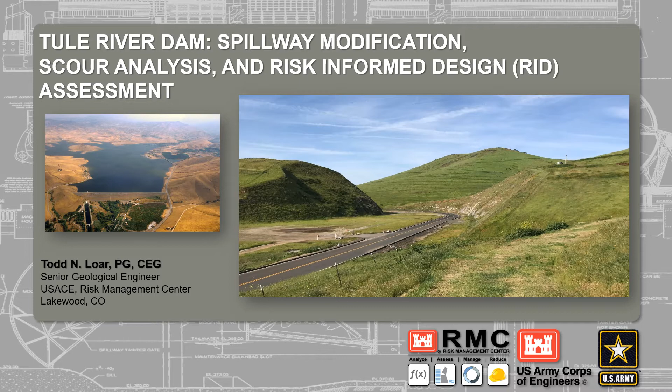Good afternoon. This case history is intended to present an example of how a risk-informed design process, our RID process, was applied to optimize a design concept for a spillway enlargement project at the Tule River Dam site. Specifically, we'll focus on the geotechnical site characterization and geotechnical failure modes that the RID process was associated with in terms of evaluating the design features and components for this enlargement.

The Tule River Dam is located east of Porterville, California, in the southern San Joaquin Valley and north of Bakersfield, and it's positioned at the lower elevations of the Sierra Nevada foothills on the east side of the San Joaquin Valley.

One thing to note is on some drawings and some references, this dam has also previously been called Richard L. Schafer Dam or Success Dam. The name has changed over time periodically, and some of those names still are on some of the reference figures and documents.

So to start things off, we're going to go back in time a little bit, to 2015, for the baseline risk assessment, the first risk assessment performed for Tule Dam. A whole slew of failure modes were identified, a lot of them related to dam performance, seismic issues, gate issues, and that sort of thing. But the primary risk-driving failure modes were identified as overtopping of the main dam and overtopping of a dike that's located further up in the reservoir.

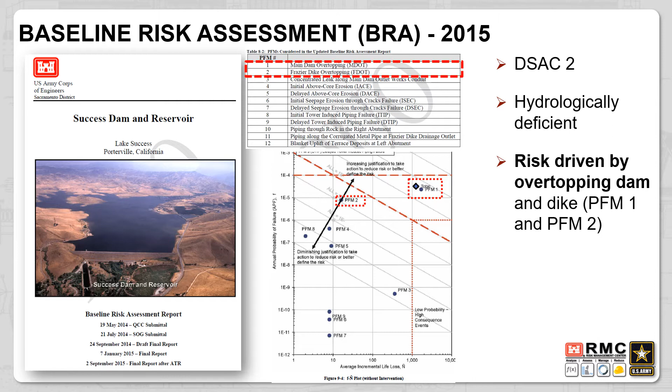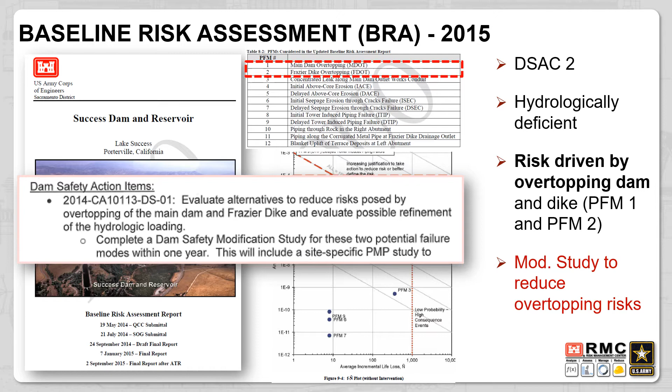The decision makers at the Army Corps, when they reviewed the project and the risk assessment, made recommendations that the teams look at performing a dam safety modification study, to evaluate structural or other types of alternatives that we could implement to reduce the risk of overtopping at the project.

The design teams came up with a concept of enlarging the spillway, increasing the capacity of the existing spillway. This was broken into two phases. Phase one would widen the spillway channel invert by about 120 feet or so, done by pushing the right spillway cut further to the north and then relocating one of the access roads that goes around it. Phase two would involve raising the spillway crest by about 10 feet to increase reservoir capacity.

This would be done with an arched ogee weir structure with apron and training walls. I should note that phase one was a little bit too far advanced in the design process and funding mechanics to implement RID on that phase of the project, so we would focus on phase two for the most part.

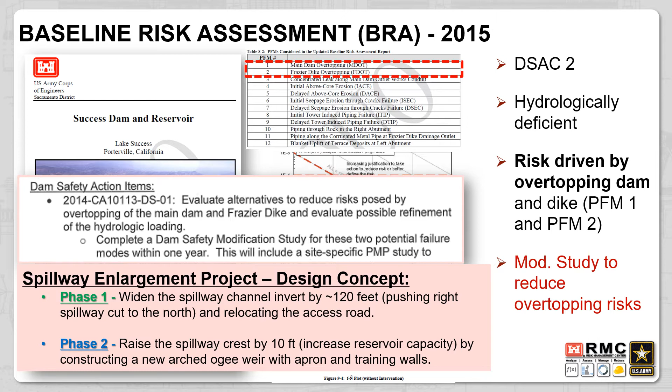We have an overall layout of the existing spillway configuration. The spillway itself is located in a deep cut about 750 feet to the northwest of the right abutment of the embankment dam. The spillway is unlined, and the invert is generally composed of variably fractured, variably weathered granitic intrusive rocks and some metasedimentary rocks with intrusive veins and dikes, typical of the foothills in the Sierras. The cut is about 120 to 140 feet deep, perpendicular to the right abutment ridge line, and the invert itself is about 250 feet wide.

That would have to be increased for the mod study repair. The current layout has a concrete control sill about 39, 40 feet below the crest of the dam, constructed into about a 6-foot deep trench, and it extends up the abutment side slopes.

We'll see a picture of that in a minute. The approach channel is about 500 feet long, and the downstream discharge channel is on the order of 700 feet long, all relatively flat, about a 1% grade. Downstream, the channel re-enters the existing drainage system that's downstream of the right abutment ridgeline.

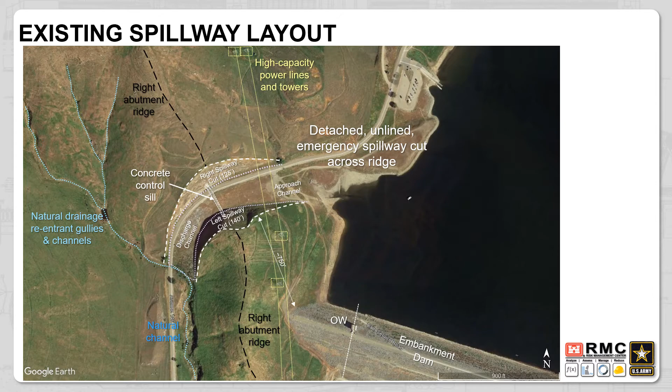Here are some general photos and layout pictures of the construction of the control sill. On the upper right, we're looking downstream and we see the right abutment sill and the left abutment sill embedded in and coming up the rock mass about 10 to 15 feet or so. In the center, you see the construction photo where we have the 200-foot long, 3-foot wide control sill that's socketed 6 feet into rock.

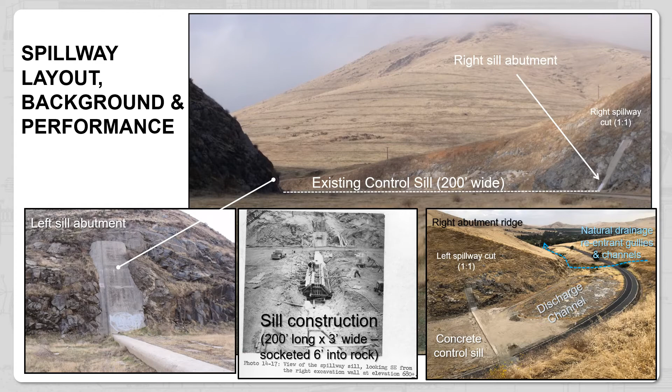The entire spillway channel was excavated using blasting methods. Here we are looking at a series of photos of the left abutment in 1959 during construction, as the operators were getting down toward this existing invert elevation.

A wedge-shaped slab of rock failed out of the left abutment cut. The wedge was formed by adversely oriented joint sets and some tension cracks forming in the rock mass on the left abutment. One of the primary things to note is that the sliding plane, the basal sliding plane controlling this wedge slab, has an out-of-slope orientation.

So that means it's dipping toward the spillway, representing a potential sliding surface for rock wedges and rock slopes. This feature is seen in other construction photos and in the field, so we have this out-of-slope dipping joint set that is potentially a bit adverse. However, over the duration of this project, since this '59 small slab failure, there's really only been small rock blocks raveling off the slope on both abutments. There has not been reactivation of this failure or any other large-scale similar slab failures on either abutment.

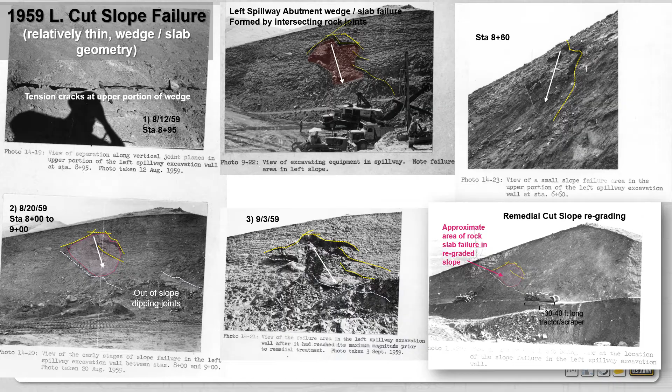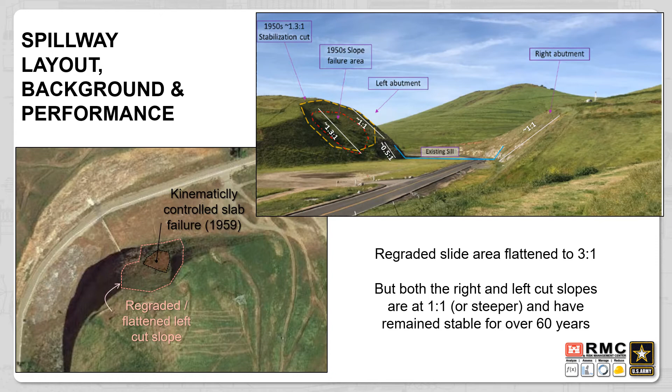The only spillway flows that have ever occurred at the Tule River project were in 1966, with a peak discharge of about 8,300 CFS through the spillway weir, shown on the hydrograph below. You can see it's a very sharp peak that dropped off fairly quickly. The peak only flowed for a handful of hours.

However, the overall duration of the spill was on the order of 120 hours passing over the sill. Downstream of the invert, downstream of the construction spillway floor where it re-enters the natural drainage channel, erosion was observed. This occurred where all that water concentrated and increased its energy going back into the natural erosion channel. So there was some previous erosion that did occur with this 1966 spill.

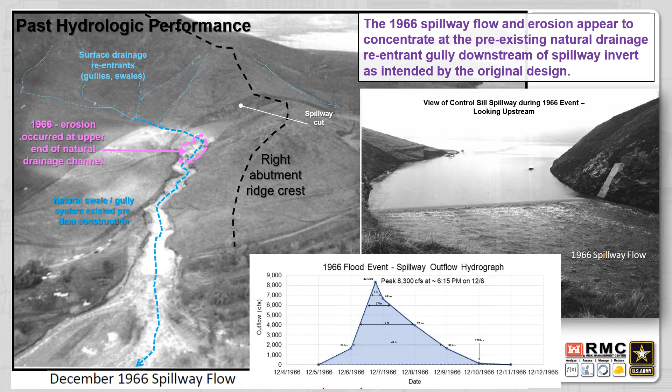One thing to note too are all the surface drainage gullies and drainage reentrants or swales on the downstream side of the right abutment ridge crest, and on the upstream side actually. All those are coalescing and getting into the main reentrant channel downstream of the spillway, then getting back into the Tule River spillway or river downstream. We'll discuss this a little bit.

Now we're able to look at the right abutment of the dam and the alignment of the spillway on a pre-construction aerial photo. We can see the spillway cut I've annotated on there, and you can kind of see the drainage reentrants. The first thing to notice, all these drainage reentrants, we map all of them and tie them into the higher order streams and drainages. We see that the drainage reentrant turns almost 90 degrees at the base of, at the downstream end of the spillway, the future spillway.

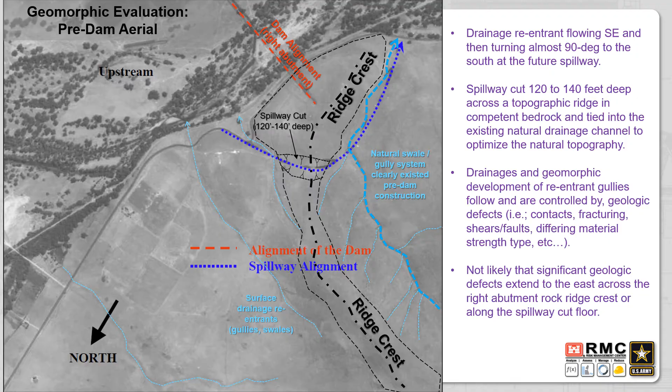The regional geology in the area consists of older metasedimentary rocks and metavolcanic rocks that have been subsequently intruded by younger granite domes and granite intrusions that have come up into those overlying host rocks. They come with a lot of hydrothermal alteration and dikes and veins that extrude out into the overlying rock mass or discontinuity features. This is very common of the Sierra Nevada batholiths, especially in the western part of the Sierra Nevada foothills.

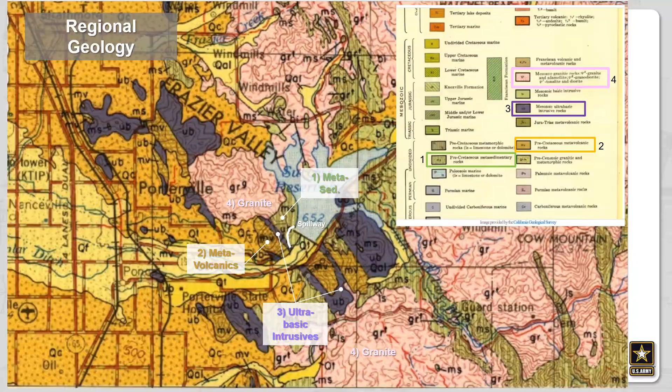Using the spillway floor and spillway sill cut mapping, control sill trench floor mapping, aerial photo delineation of lineaments and features observed in the cut slopes, delineation of weathered versus unweathered zones, and the field mapping effort, all are compiled to understand the geologic conditions, the fracturing, the location of shears, and the areas of contacts that we may need to look for.

For the most part, the mass of the spillway is excavated through what would be characterized as fairly competent granitic or quartz diorite type bedrock, but there's clearly zones or pockets of highly weathered rock or more intensely fractured or broken up rock zones. These zones need to be more clearly delineated, and that's what we do further on in the field studies.

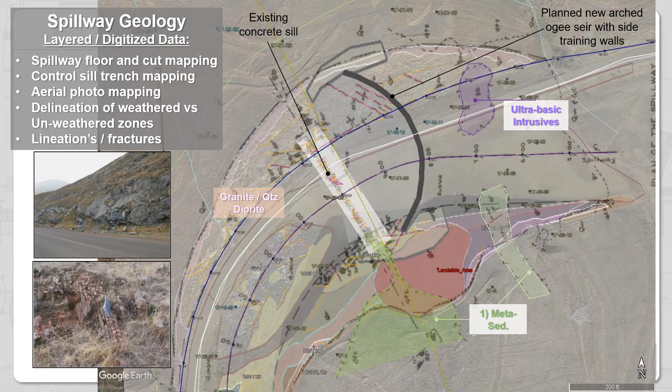Based on the field observations and field mapping, we were able to identify areas where there was more intense weathering. One thing that does jump out is that there seems to be a weathering rind across the top of the granitic and diorite intrusive rocks on both abutments.

And then there are areas or pockets, as I mentioned before, of more highly to moderately weathered and highly fractured rock. So the key for spillway erosion is to try to identify or map out spatially, vertically and horizontally, where these areas of more erosion-susceptible rock masses may or may not exist, and to try to extrapolate those in the direction of the erosion and with depth, to understand those areas a little bit better.

So that's what this map is compiling, all of the observations and all of the field information that we are able to compile from the drilling and the field mapping and other efforts.

We were fortunate enough that during original construction there was geologic mapping of the sill base, the floor, and also a cross-section compiled looking downstream. So that's what's shown here. On the top we're looking at the sill floor in plan view, and down below we're looking at the sill slope, like a cross-section along that sill alignment.

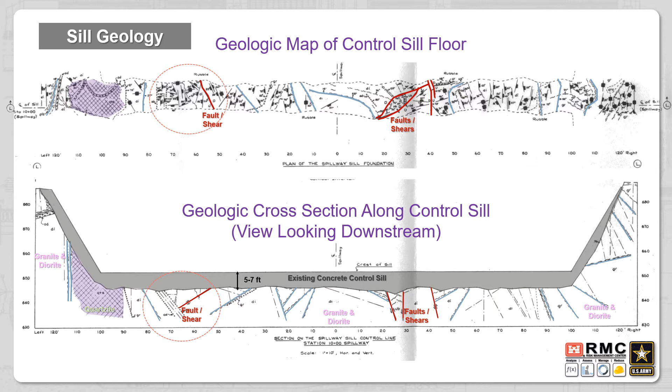And that correlates with some of the observations we saw.

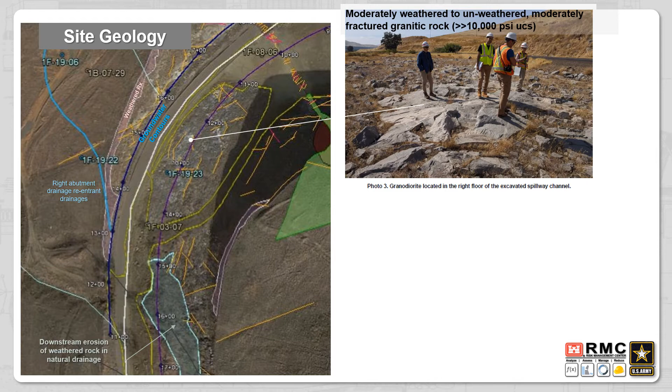During some of the field exploration and mapping efforts, the teams were able to identify and delineate these areas of good versus bad or poor rock masses. For the most part, across almost a majority of the sill invert foundation, we see that we have moderately to unweathered and moderately fractured granitic rock that is of high rock mass quality. It has well over 10,000 psi for the unconfined compressive strength. The joints are somewhat blocky and discontinuous, making up a very highly resistant rock mass for perhaps 90% or more of the entire spillway foundation.

But similar to what we saw in that last section, on the left side of the spillway invert toward the base of the slope, there was a zone that was identified that looked to be slightly more weathered. It was highly to moderately weathered and more highly fractured, and this correlated with lower unconfined compressive strengths of less than about 5,000 psi. This is the material that's also exposed in the erosion channel at the downstream natural drainage reentrant.

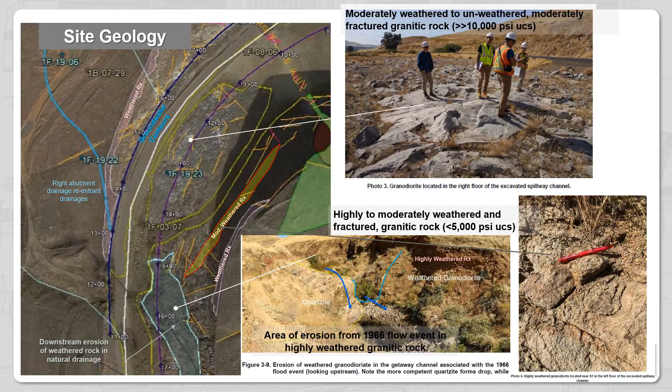All right, so now we have a little bit of a concept of the geologic conditions in the abutments and abutment cuts and the spillway invert. So let's talk a little bit about the design.

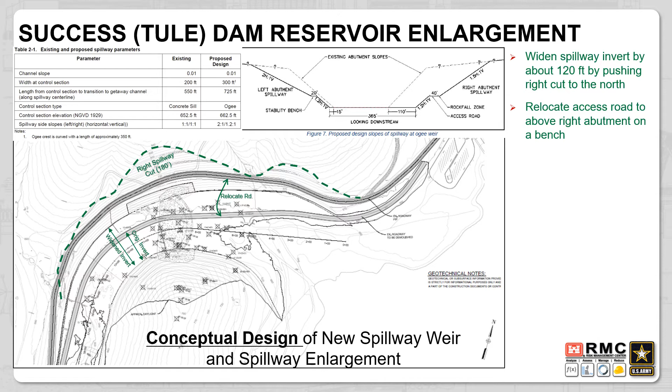Phase 1, as I mentioned before, the project was broken into phases. Phase 1 would involve pushing the right cut slope about 120 feet to the north, and then relocating the access road above the planned new weir crest elevation. Phase 2 would involve construction of a new concrete arch spillway weir about 10 feet above the current sill elevation.

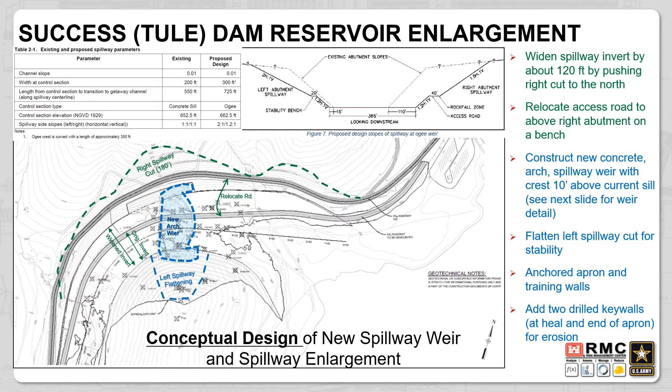We would potentially flatten the left spillway cut to improve stability, and then we'd add anchored training walls on both sides of the spillway. The design also involved putting two drilled key walls, like erosion resistant cutoff walls, at the heel of the arched weir and at the toe of the apron.

All right, so this is the preliminary phase 2 weir structure design, and this was what we had going into the RID evaluation, the risk informed design evaluation. We have the new arched concrete weir to transfer loads out into the abutments. Both abutments would be protected with upstream and downstream concrete training walls, and we will extend the new apron in a downstream direction.

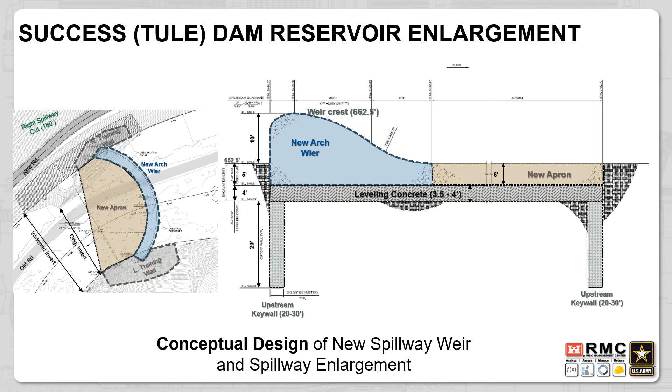On the right, we see the cross section. So we see that we have almost 9 feet of excavation into the rock, into the existing spillway invert. And then we have the two key walls, downstream key wall on the right and upstream key wall on the left. These were intended to extend 20 to 30 feet and be constructed with large diameter drilled columns through the granitic rock in the foundation.

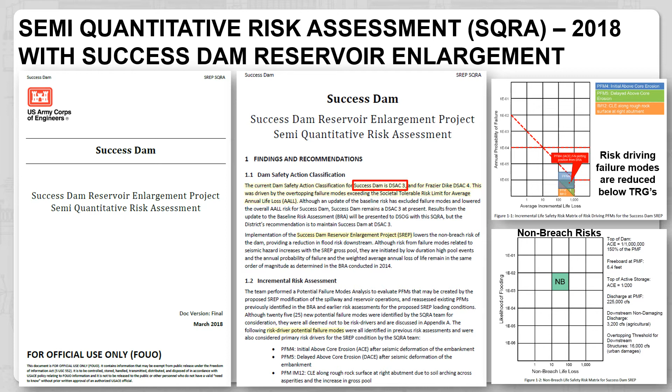Okay, so real quick for reference, throughout this process, the risk cadre and the district got back together in 2018, and they did not look specifically at the design details of the spillway. What they looked at more in general was whether the new spillway design adequately passed flows so that we would reduce the risk of PFMs related to overtopping. The findings were that yes, the new spillway design, the enlarged capacity of the spillway, would reduce the potential for overtopping and improve our risk related to those failure modes at this project.

So risk-informed design at the Army Corps is dictated in Engineering and Construction Bulletin 2019-15, which requires risk-informed design as part of project delivery. This is to help ensure the designs meet USACE tolerable risk guidelines and develop a basis for design for uncertain engineering conditions or decisions.

For our case, we wanted to look at potential for scour, loading on the weirs, the abutments and cut slope stability issues, structural stability, sliding stability, and put this into a risk framework, which had not been done in that amount of detail in previous risk assessments. This also helps us identify vulnerabilities and susceptibilities in the design, because there's always a possibility that a design element in a project might actually cause an increase in downstream risks, so we've got to put that into context.

The other thing the RID does is help us optimize the design and focus on the more susceptible elements of the project rather than just taking a template off the shelf and using traditional concepts in that design. This also helps improve our communication of major design decisions. The RID is scaled to fit the schedule and scope of the project, so it's a little different than our SQRAs or QRAs, which have a very robust amount of work and expectation. The RIDs can be scaled to fit the project more appropriately.

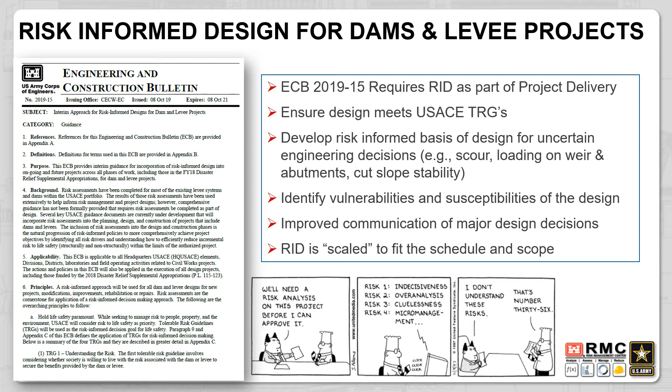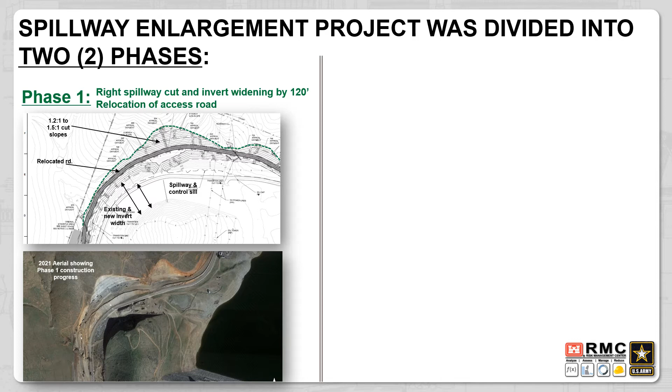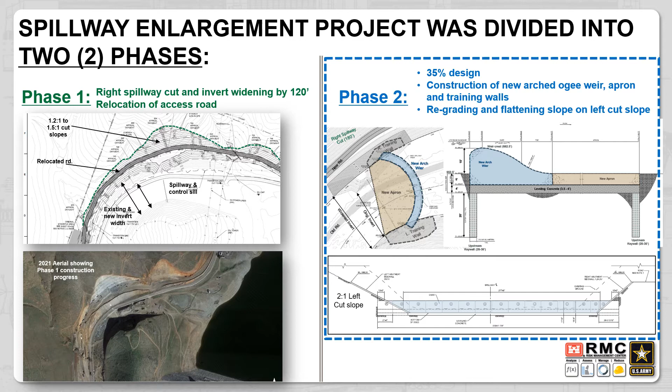Okay, so I think this is sort of a repeat slide, but the point here is that phase 1 involved cut slope construction, pushing the cut slope on the right side 120 feet to the north, and that was not part of the RID evaluation—it had been too far along to include. But what was included was the 35% design for construction of the new arched ogee weir with the apron, training walls, and upstream downstream key walls, and then regrading of the left abutment slope. So that's what we were mostly focusing on in this effort.

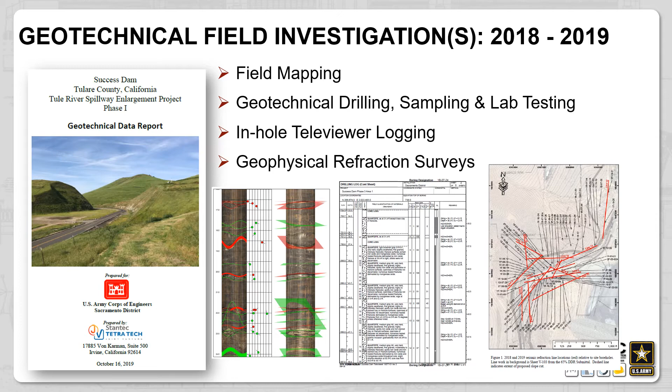Okay, so we're going to go over a little bit of the field data and the information that was collected that we had to work with respect to performing the geotechnical risk assessments for the new weir structure. A lot of this information was collected between 2018 and 2019, including field mapping, geotechnical drilling, sampling, and lab testing, in-hole or down-hole televiewer logging, and some superficial geophysical refraction surveys and other information. So we'll run through all that as fast as is practical.

All right, so the SPK district, Sacramento district, had developed these processes, I believe, for Isabella and possibly other projects where they made criteria and defined their various weathering degrees for granitic type foundation rock, ranging from decomposed granite to highly weathered, moderately weathered, slightly weathered, and unweathered. They have a lot of criteria, evidence, and cross-referenced information that can be used to map, delineate, or log the granitic rock according to these weathering grades. There's also other weathering grade criteria and tables that are useful to use.

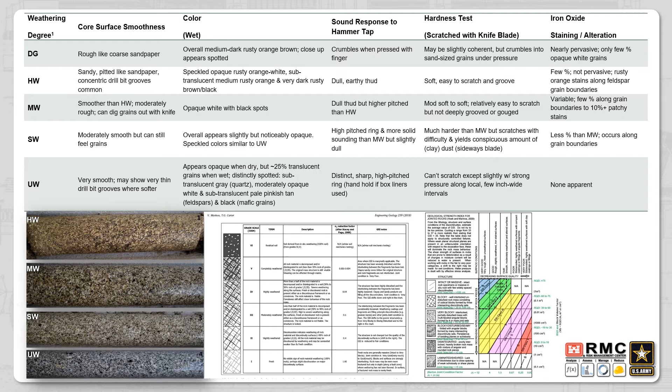Another way to do this would be to use, for example, a GSI type mapping of the rock mass, which includes both weathering grade but also fracture intensity. But SPK also was able to bring the degree of fracturing into their mapping.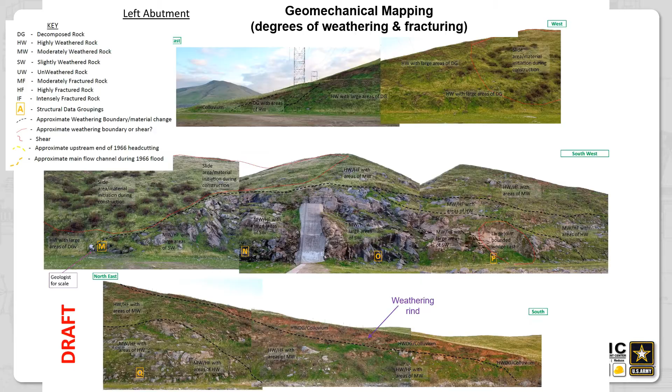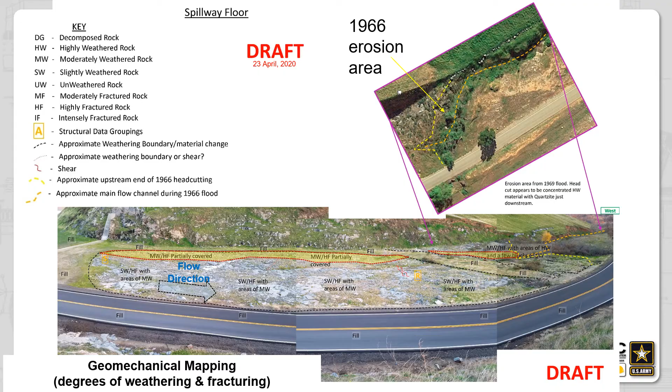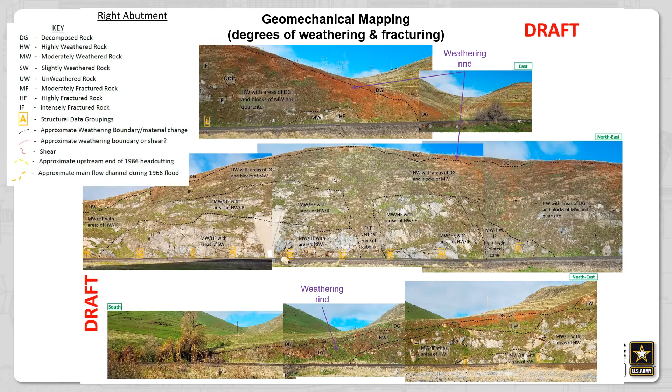So we have to be able to understand what the spatial extent and distribution is of those highly weathered or challenging zones, and figure out if those exist in the area of the spillway flow.

The typical geotechnical subsurface data collected, compiled, and synthesized throughout the project utilized all of the rock quality parameters measured in the field and in the mapping: RQD, RMR (rock mass rating), weathering, and fracture intensity. What we see when we compile all this information is that for the most part, all these parameters improve with depth, particularly below about 20 to 40 feet or so. The rock quality improves, the strength improves, the weathering reduces, and the fracture intensity becomes less tightly spaced. So overall, in almost all the drill holes and almost all the data we've got, we see this improving rock mass quality with increasing depth.

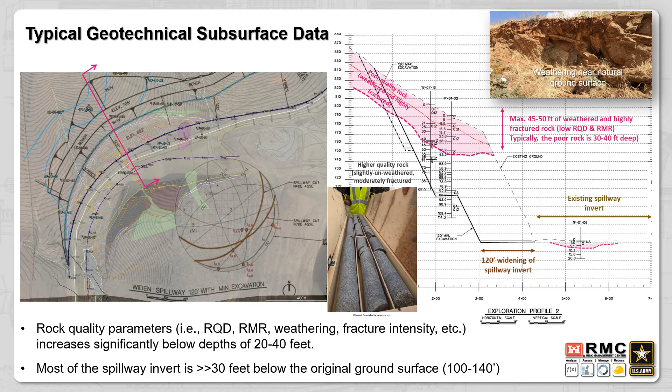Most of the spillway invert is well over this 30 to 40 foot depth below the original ground surface, if we remember. So it's probably mostly on the order of 100, 120 to 140 feet deep through the most critical part of the spillway invert.

Just a quick statistical graphic showing the relative unconfined compressive strength of the different weathering grades identified in the granitic rock. For the most part, the average of all the rock mass that was better than moderately weathered had an average PSI of about 20,000 pounds per square inch. So even the moderately weathered granitic rock has really high unconfined compressive strengths.

We also have to realize it's the degree of fracturing and fracture orientations and that sort of thing that may control erosion, but that's a good indicator of pretty competent, strong intact materials. The highly weathered material is very weak, in that geomechanical zone of less than about 2,000 psi, where it is weathered and can be eroded and plucked, with particles just pulled out of that type of material.

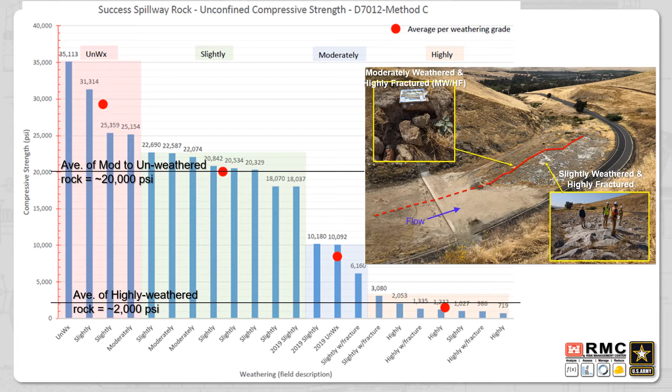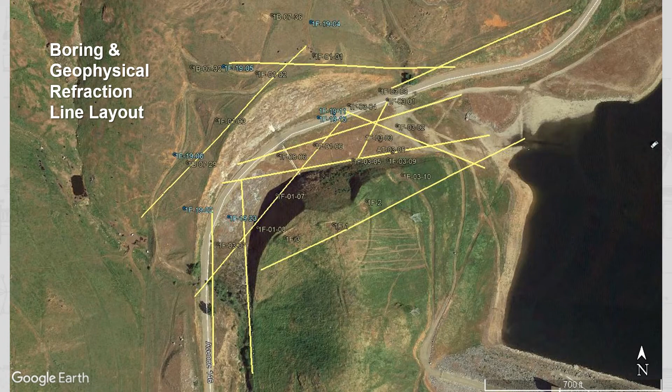Here's a layout of all the geophysical lines that were run, the refraction lines. We have a number of them that cross the spillway invert, running upstream to downstream, and crossing from left to right across the spillway base. We'll look at a few of those in more detail.

An interesting sidebar related to rock erosion: the SPK district did a ripability study at Isabella Dam, located pretty close to Tule River Dam and within probably similar granitic intrusive type masses. They did this ripability study in the granite rock there, and found that in general, when they had seismic compression wave velocities greater than about 5,000 feet per second, that material became virtually unrippable. They had a very difficult time ripping through it with the shanks on a dozer.

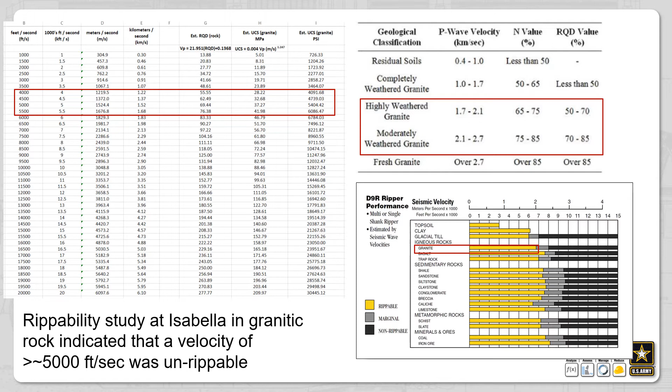They used that criteria as a cutoff for where you have competent rock masses that do not lend themselves easily to being removed even by physical excavation methods. That correlates to some degree with the Caterpillar analysis relating seismic velocities to the overall rippability of material. In their plot, highlighted in red, the granitic rock shows up more on the order of 6,000 to 7,000 feet per second as being unrippable. But those are good numbers to keep in mind when thinking about the relative erodibility of materials, because the rippability parameters go into our rock erosion assessment.

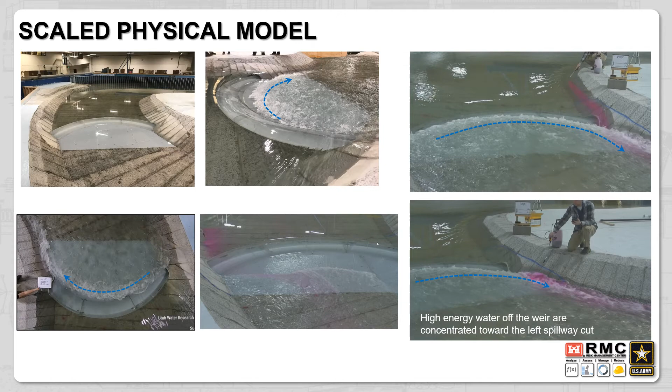That was compensated for by extending the apron section much further downstream. But the thing to concentrate on is the lower right photo, where you see the pink dye concentrated right in and around that left abutment training wall area.

In addition to the physical model, a CFD model was developed for the weir and the channel downstream. During the PMF event, we're getting velocities of about 15 to 20 feet per second in the invert of the spillway channel. Then as soon as the water gets back into the natural drainage channel with steeper grades, velocities increase significantly to 25 to over 30 feet per second downstream.

This correlates with what we'd expect, since the spillway invert is fairly flat, transferring water along that 1% grade. So 20 feet per second isn't exceptionally huge, but when it gets down to 30 feet per second at that reentrant area where it's concentrating, the stream powers are probably somewhat significant there, especially because we're looking at more weathered, more highly fractured rock down in that reentrant gully.

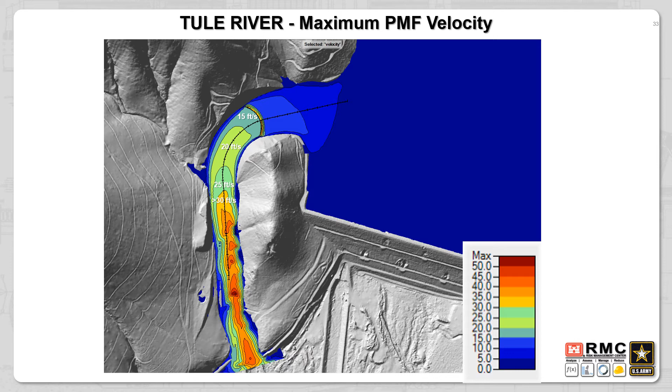It's somewhat clear that the concern was down at that transition area, where the spillway discharges into the natural gully, the area that had eroded previously in 1966, where we're seeing a lot of more highly weathered and more highly fractured granitic rock. It's closer to the original ground surface, so it might be exposed to more of the elements over a longer duration of time.

So clearly that was a concern for the design team, and we needed to understand what the rock scour potential is. This is also in light of the fact that Oroville Spillway had failed a couple years previously due to undermining and erosion and exploitation of a highly fractured, deeply weathered shear zone that transected up and across the spillway foundation. So how do we make sure we don't have that situation? How do we characterize it?

So a consultant was brought on board that has significant experience in rock scour analysis, and they performed this scour potential study for the Army Corps.

And the sequence of events for this failure mode would be related to, one, initiation of the natural channel downstream. So this is in the weathered granitic rock where flows get concentrated, velocities go up, stream powers increase, and you have more aerated and agitated water that can exploit that weak material.

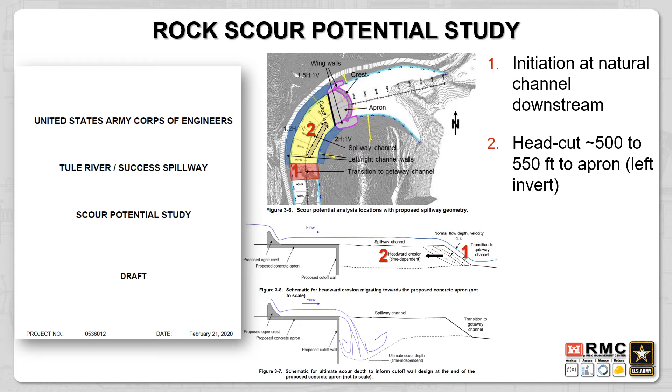The next phase of this would be to head cut about 550 feet upstream along a potentially more weathered geologic discontinuity or weathering zone along the left side of the spillway. We would head cut all the way to the apron. Then we would down cut below the apron sill and maybe below the cutoff or those erosion resistant key walls. So the study that was performed focused on these three phases: rock erosion and head cut, scour progression, and down cutting progression.

Thing is, what this rock study did not cover, and this is what we have to really think about in the risk assessment, is that it did not do anything with respect to the apron removal - lifting 3 to 6 foot thick anchored slabs off of what might be competent rock. It did not assume any head cutting under the apron or under the weir, doesn't assume any of the arching structure of the weir, and doesn't assume any of the 3D structural effects that would provide some resistance to having to remove the weir.

So they studied these first three parts of the failure mode, but they did not progress the failure mode all the way up. But that's okay - that's what we do with their data. We use their information, or information we collect, and then we bring it into the failure mode and make sure we understand which part and how it intervenes or intersects with the failure mode sequence that we develop.

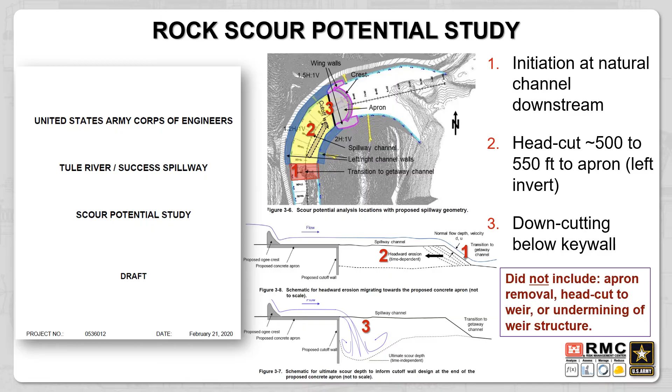So for the head cut initiation, the project is fortunate because in that 1966 flow event, we did experience erosion, and it's erosion that we can measure when we compare the pre-1966 contours against the current day contours. So you can see how much material was eroded, how the channel changed, how the morphology changed during that event.

And so this was used by the consultant to analyze the initiation using shear stress analysis and detachment rate type evaluations. They were able to come up with a threshold criteria for the material that did erode during 1966, because we knew the stream power and the flows.

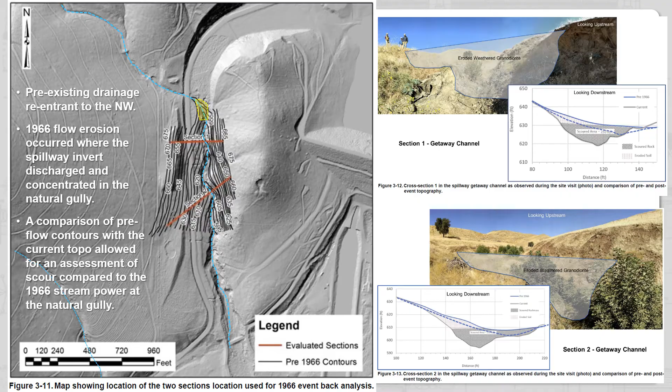They evaluated all the different rock masses, identified or delineated them based on some of the geomechanical mapping that the Corps did, and from some of the drill holes. So they were able to classify 5 different rock mass types or rock mass zones in the spillway.

They identified the left abutment wall, which is moderately weathered. They identified the left floor of the spillway, the area where we've had our concerns that there might be weaker rock - that's moderately weathered to highly weathered, shown in the red belt running from the re-entrant channel back up to the sill. They looked at the right floor, which is not very weathered at all to unweathered, very strong, very competent, composed of very resistant granitic materials. And then the right wall, which is slightly weathered, but not nearly to the same degree as any of the others.

So they were able to identify the stream power erosion initiation threshold for each of these different rock types, and that's plotted down in the lower right on the Annandale chart, if you'll recognize that. Those can then be correlated to stream powers and flows during the hydrograph progression. The one thing to understand in a risk assessment when using this data is that there's a lot of assumptions made to derive these criteria.

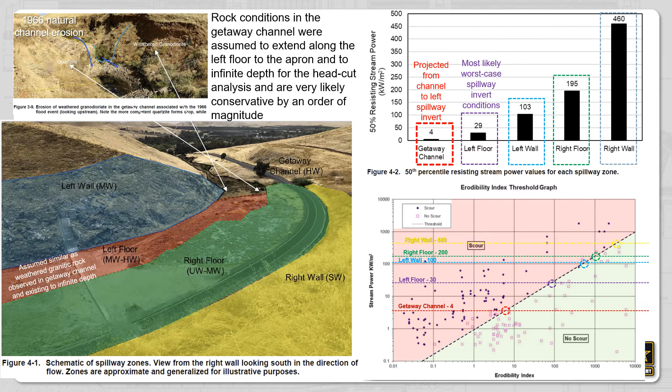One of the conditions considered for this evaluation was the re-entrant channel, the highly weathered granitic rock on the left floor, extending along the left floor of the spillway invert, up to 40 feet wide, which doesn't necessarily fit field observations or geophysical observations, and that it extends to almost infinite depth. So that's a block of weak rock extending to the center of the earth, with no vertical variability or improvement in the rock mass. A lot of this analysis and progression relates to conservative assumptions, and there are others I'll point out as we move through.

When performing the risk assessment for a rock erosion type analysis, we also have to put time or temporal controls on the progression of the failure. It's important to understand the outflow spillway hydrograph, the durations and magnitudes of varying flows, and being able to position your failure mode on the hydrograph throughout time is critical to evaluating the progression and probability of this event occurring during the PMF or other spill events.

Based on a thorough, comprehensive review of the technical and physical assumptions of the rock scour erosion analysis, our conclusion, which we documented well, was that there are multiple layers of compounding conservative parameters, values, and assumptions for the rock mass, the stream power, and the erosion mechanics used to evaluate the head cut, initiation, and down cutting parameters presented.

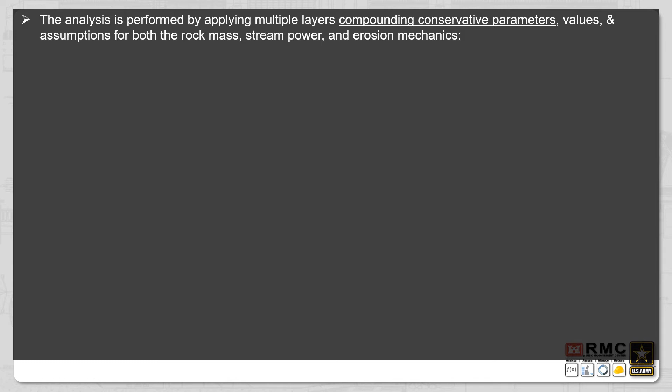One assumption was that the peak flow, the highest stream power possible, is applied at initiation, at head cut propagation, and at the scour depth at the end of the apron, assuming infinite time. These assumptions aren't realistic, because it takes some amount of stream power to trigger initiation, then some amount of stream power and duration for head cut, and then more to reach the depth necessary to undermine the weir or apron slab.

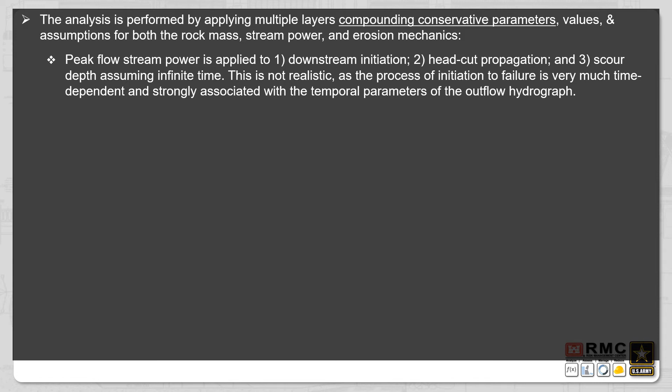So the problem is, once you put this into a temporal aspect, where are you on the hydrograph relative to all these events? It's difficult to determine, though you can do it qualitatively in the risk assessment based on information in the report. But we have to consider where you are on the hydrograph - if you're on the falling limb, stream powers reduce quite rapidly at some point, so you may not have the energy or duration to create the problem.

The left spillway channel floor was analyzed using very weak, poor rock mass properties, similar to the weathered material observed in that reentrant natural drainage channel downstream, which was close to the ground surface and stream flows, getting wetted and dried quite frequently. I'd expect a natural surface to be much more weathered than material 120 to 140 feet below the natural ground surface in the heart of that right abutment ridge, which doesn't necessarily correlate well with our geotechnical data.

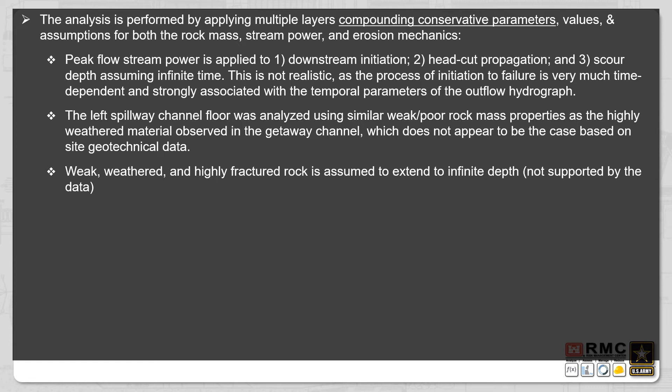The weak, weathered, and highly fractured rock along the left part of the spillway invert was also assumed to extend to infinite depth. None of this seems to be supported by the geotechnical data - not the drilled hole data, not the field mapping observations, and not really the geophysics either. So we have a break here, and these assumptions may be a bit conservative.

This is also interesting - a conclusion of their report was that the PMF has only a 3 to 6% chance of having 60 to 80 hours of flow remaining to scour vertically at the end of the apron, after initiation and head cutting have occurred and reached the end of the apron. So there's only a short amount of duration left on the falling limb of the hydrograph to not only downcut and undermine the apron, but also head cut, remove apron slabs, and fail the arched spillway weir.

So if the initiation at the downstream reentrant channel requires PMF stream flows to initiate, this means that the head cutting, undermining, slab, and weir destabilization all have to occur on the falling limb of the outflow hydrograph as the stream powers are decreasing and decreasing.

The assessment does not include undermining, uplift, and removal of the aprons, or the additional head cutting about 200 feet to get under and destabilize multiple ogee monoliths. But that's okay—their analysis and their scope was not to do the risk assessment.

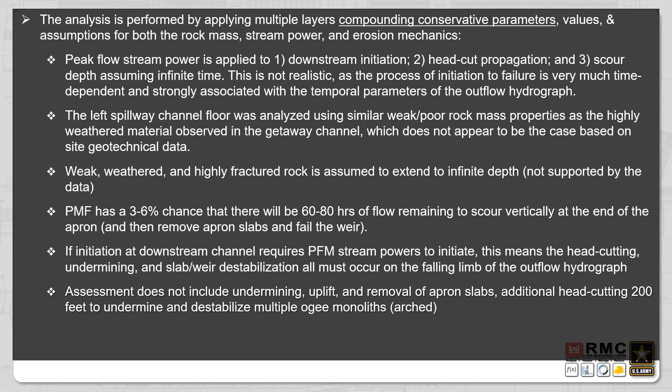So we use their data, their assumptions, their information, and then we put this into the failure mode sequence, so in our overall failure mode sequence we can account for these factors as well. Overall, their report and documentation and technical analysis was extremely useful. It was informative, well compiled, and we could glean a lot of information and data from it, and it strongly informed our risk assessment.

But it does require really high-end technical review and interpretation and judgment of their conclusions, and communicating that information to the rest of the team so everyone knows what the assumptions are and what information is contained in that. And then we apply all those results into the design and our risk assessment.

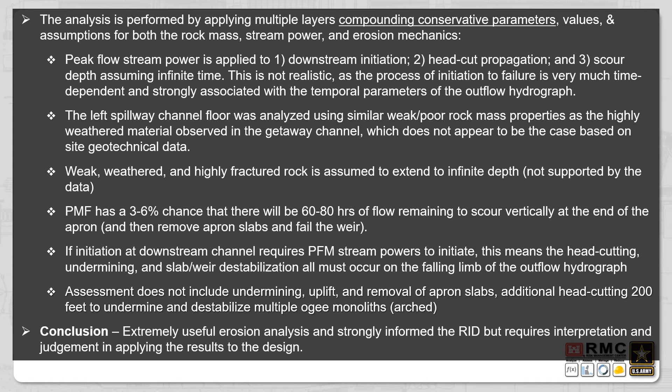Okay, so now let's get to the meat of all this. You've got background on geotech, background on design, background on the analyses, the scour analyses, and other information. So we have to put all this together and bring it into the risk assessment. I'm going to jump to the end real quick here.

We identified almost 32 potential failure modes for the spillway structure. However, we screened out or combined some of them because they had similar mechanics, down to 7 credible failure modes. And then 2 of them were determined to be risk driving, and both happened to be geotechnical and geologic related.

PFM1 was the head cut initiates, which is what we just talked about. This was the main concern for the dam—the head cut initiates downstream at that channel reentrant. It head cuts 500 plus feet upstream, undermines the apron, undermines the spillway weir foundation and multiple monoliths probably, and results in sliding, failure, or breach of the spillway weir.

PFM 13 was also identified, which had been somewhat considered in the design with the training walls, but this is one that we ended up focusing on a little bit more. This would be like slope instability on the downstream left cut slope face and adjacent to the concrete sidewalls, or those wing walls.

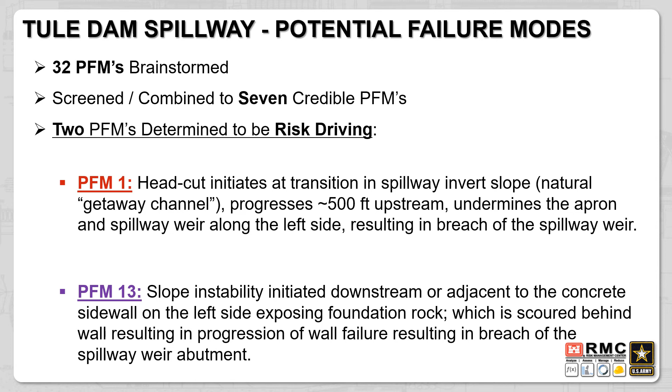It fails the concrete, crushes the concrete, exposes the foundation rock, which is then scoured because all the spillway flow is now concentrated right into the left side of the spillway, if you remember from the physical model. So this results in removal of the buttress of the arch or undermining of the monoliths on the left side.

Okay, so let's look at a graphical representation or graphical sequencing of these failure modes. So PFM1, right—here we start. We have a flood event, the PMF or something similar to the PMF, where we have enough hydraulic energy and enough erosive capacity to initiate erosion down at the downstream toe.

That's on the right side of this image. So the erosion starts and it progresses. It progresses upstream 400, 500, 550 feet along the left side of the spillway invert, where the rock has been identified as being more highly weathered or highly fractured, and might have lower erosion-resistant capacity.

And then we have to downcut, so it's cascading—flows are cascading off of the end of the apron. They're eroding the rock downward below the cutoff key wall. So we're undermining, and we have to have failure of the key wall.

And then we have to undermine, lift, and remove the anchored and reinforced apron slabs. And we have to head cut back upstream under all those features and remove those features another 150, or 125 to 150 feet, to undermine the weir, to the toe of the weir.

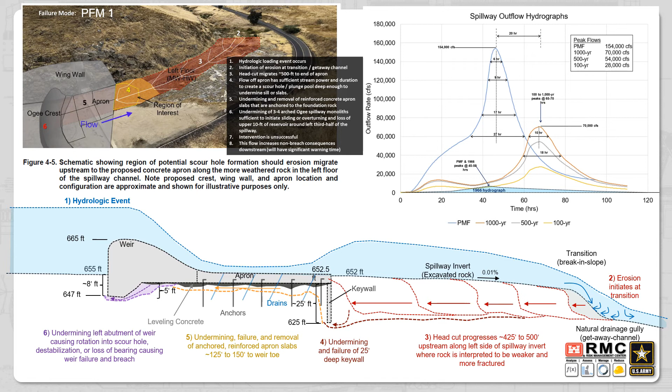Then we have to undermine the left abutment weir, causing rotation into the scour hole, some sort of destabilization of the arching forces, or sliding or removal or loss of bearing capacity, causing the weir to fail. So at some point we lose and breach this structure over on the left side. That's the failure sequence—that's a graphic we use in sequence.

It's really helpful for everybody to watch these and see them in detail, with all the nuanced components, because this is what we then form our elicitation on.

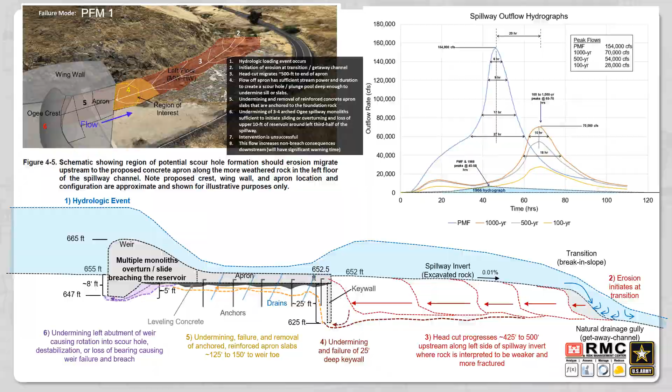Once everybody knows the failure sequence and knows as much about the conditions and assumptions made in the various analyses, the geotechnical data, and the interpretations the geologists and geotechs are making, we sit down as a group and compile all of the more or less likely factors. These are the factors that either promote the failure or make it less likely or more difficult to occur. You have to be very diligent with these—you don't want to repeat them, and you don't want them to conflict with each other. So a lot of thought needs to go into these more or less likely factor tables.

But this is probably the best part of the risk assessment, just as a matter of opinion. Compiling the more or less likely factors, defining them, being very clear about what goes into our assessment of the probability of this event occurring from initiation to failure—all of this is compiled and summarized in these tables, and it helps inform everybody and helps with the elicitation of values.

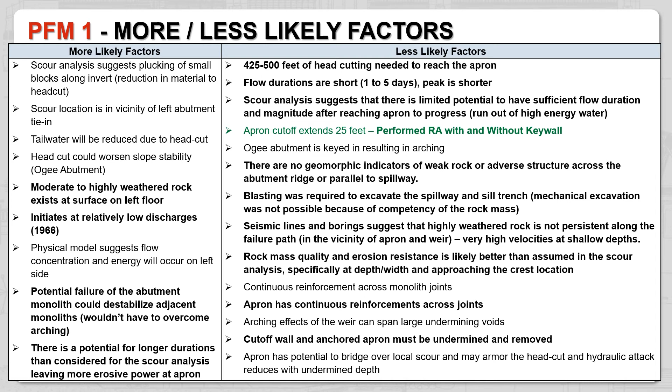I just put this up not for anyone to read necessarily, just to show the more or less likely factors we came up with for the erosion failure mode.

Now we'll look at some sequential figures we developed to describe the other failure mode we were pursuing: the left spillway abutment slope failure that fails the concrete sidewall and exposes it to high velocity flows, because this theoretically happens earlier in the spillway event.

Let's see if I can go through this. This is a busy slide, so I tried to break it apart into a couple of sections to help with some visualization tools and other things.

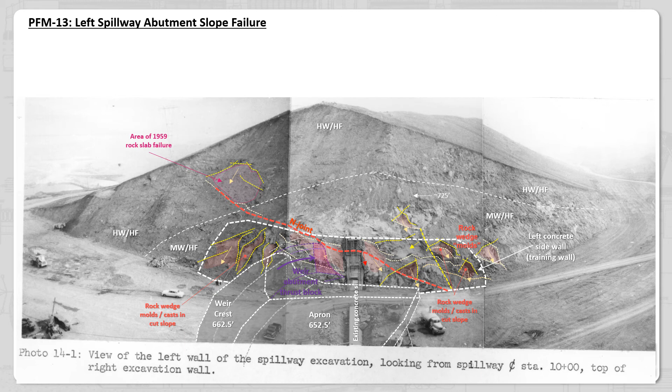First, we have all of the identified rock mass and rock joint features. In the upper left area, you see the 1959 rock slab failure, which occurred on an out-of-slope dipping joint identified as the N joint by the design team. Those out-of-slope dipping joints occur quite frequently in this slope—they seem to be all over the place. They have a certain orientation and configuration relative to the slope and are controlled by release planes and side planes that allow possible kinematic removal of blocks of varying sizes. We see this in the analysis, in construction photos, and in the field mapping on site.

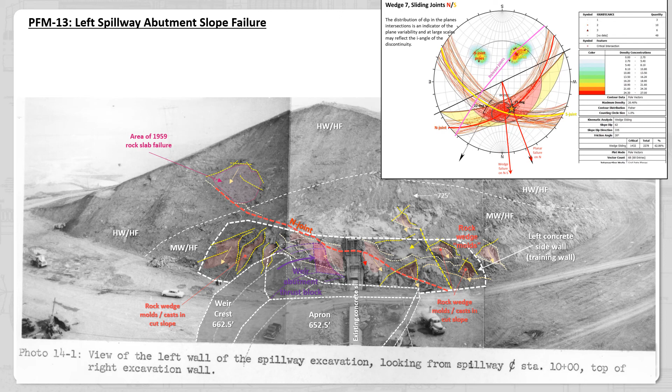We can see this when we plot it all up. I'm not going to go through the details of the StereoNet, but these show the N joint and another joint, the S or side joint, demonstrating both planar sliding on the N joint and wedge sliding on the intersection of those two joint angles out of that slope.

So now we can see that the first phase of this failure mode is that a relatively large rock wedge—something bigger than in 1959—is formed by those out-of-slope dipping discontinuities, joint N, and another one, joint S, that also comes out of the slope. These fail when high pore pressures in that abutment act at the base of and on the side planes.

This is due to increased precipitation—we have no instrumentation in this left abutment slope, so we don't know where the groundwater is or how it has behaved over time. The assumption is that we might get high groundwater from this PMF event, a lot of rain on this slope, elevating pore pressures and triggering this type of wedge failure, shown here by the red faded area, with the release joint in pink, the S side joint in yellow, and the out-of-slope dipping N joint. This fails down onto, through, or deforms the left concrete sidewall training wall.

The next part of this failure mode is that the block causes this reinforced and anchored left sidewall training wall to be heavily damaged, deformed, crushed, and ultimately fail into the spillway flows, which are concentrated toward that left abutment. This exposes the rock in this immediate area, which is then attacked by potentially high flows and high velocity water.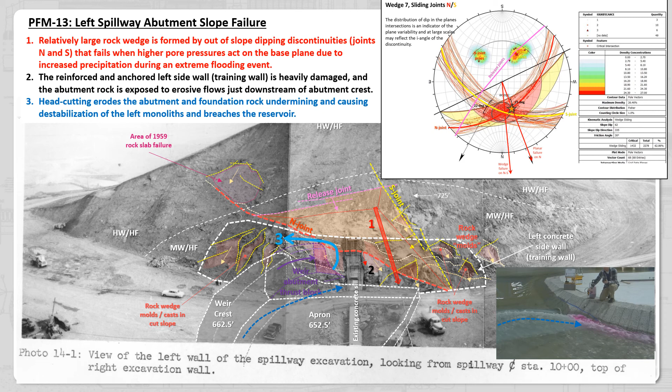This is also shown in plan view with the StereoNet and kinematics in plan view, the release joint, side joints, and the potential varying out-of-slope dipping end joints that are there. So this becomes our more concerning failure mode, because the flows are all concentrated here.

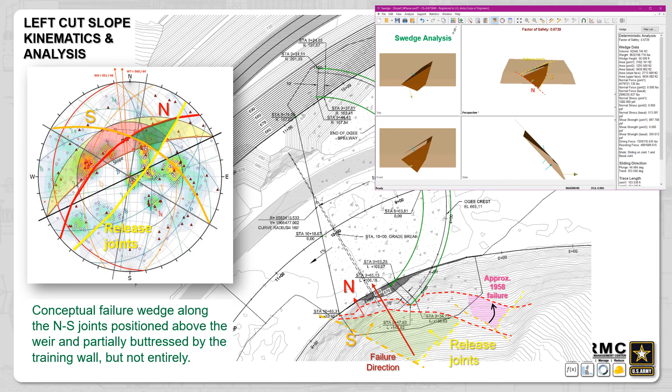If we get a failure, the erosion only has 50, 60 feet of rock to remove in that duration. So we did some kinematic analysis, lots of it, and then some wedge type analysis to look at this. Again, we didn't really know what the pore pressures were.

But we had to make some assumptions. Again, just a figure showing all of those more or less likely factors that make this failure mode more likely to occur. All the observations, the stability analysis, the out-of-slope dipping joints, that sort of thing, the unknown amount of uplift pressure or pore pressure that may be in that slope in that area. And then we have the less likely factors, maybe that our concrete wall does have some anchoring, it has drainage in it. We have the thrust forces of the ogee pressing into and onto that slope.

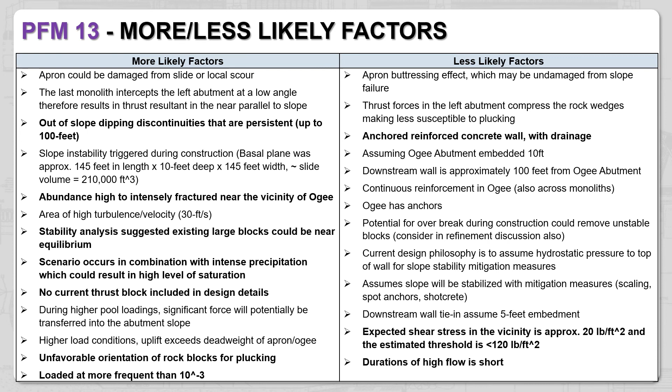And so this is again reiterating the thought and the attention and amount of detail that should go into these more or less likely factors. These really form a lot of the basis for the elicitation, for the team discussions, and for everybody to understand the driving conditions for not just their elicitation assumptions or impressions, but the communication between everybody.

Okay, so here was our updated risk characterization for PFM1, the head cutting, initiating and migrating upstream and failing the dam, and our elicited estimate of PFM13, the slope instability.

So I'd also like to point out, I didn't really have a slide on this, but we performed the PFM1 elicitation and evaluation. We did it with the key wall, the erosion resistant cutoff wall at the toe of the apron, both with that structure in place and without it. And what we found was that it did not impact the risk in any measurable magnitude.

So we ended up plotting pretty much the same very, very low likelihood of this failure leading to a breach with or without that key wall. That's an interesting part that came out of this risk evaluation. Then we evaluated the other slope without measures. So on PFM13, we did not have any left slope or training wall stabilization measures imparted, so we plotted a little bit higher on the risk characterization matrices.

Okay, so then the team sits down and we start thinking about what we can do for PFM13, what structural measures and what features can be accounted for. A lot of that discussion involved maybe a thicker training wall, concrete slopes, more drains, and it really focused on anchoring the training wall back behind the potential slab failures, the wedge failures, and putting in some slope stabilization structural measures into that design, also adding drains up into the abutment to get water out of that slope. So when we bring those structural elements into the training wall design, PFM13 can be significantly reduced by almost an order and a half of magnitude.

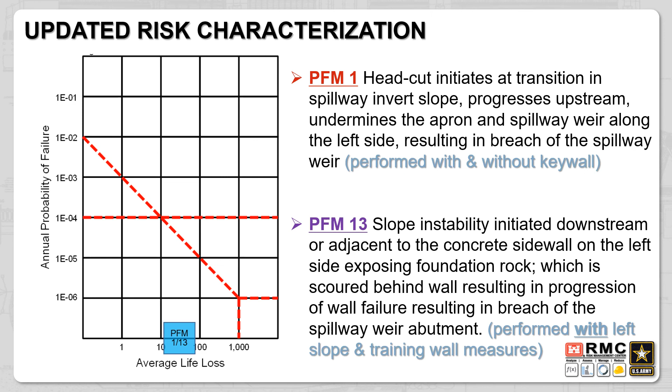Okay, so the major findings from the risk-informed design of the new spillway structure: the team identified concerns associated with the left abutment slope stability and the ability of the abutment to accommodate the hydraulic loading expected from the crest. Recall that all the water, after it flows over the crest, gets concentrated onto that left abutment slope. So those two things really were driving some of those concerns: the concentration of water and the potential for slope instability and maybe damage to the training wall.

The rock quality on the left spillway invert is worse than on the right spillway invert, obviously. I mean, the right side was highly competent, highly resistant.

The conclusion was that during excavation of the apron and the weir structure, we would really be able to characterize, map, delineate, and understand the extent of poor rock in the left abutment. So if poor rock is encountered, it should adhere to more appropriate and robust foundation acceptance criteria, such as over excavation and backfill grouting or leveling concrete in areas where rock is excavatable, not where we have to blast it out.

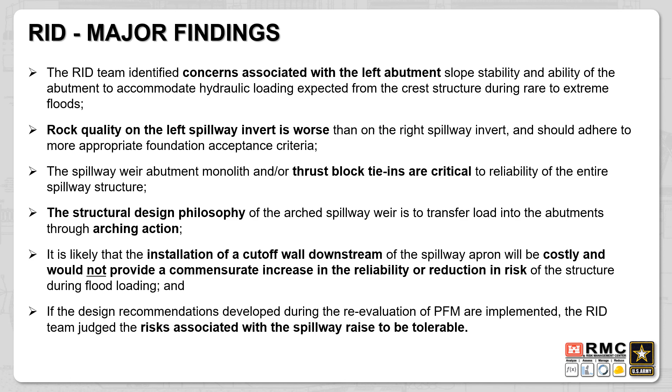If the design recommendations developed during the reevaluation of the PFM are implemented, the RID team judged the risks associated with the spillway raise to be tolerable, according to Army Corps codes.

After all that, we get to the final, more advanced designs that account for some of the RID findings, where now we have the anchored ogee weir with a heel shear key. We have only a 2.5 foot thick apron, reduced from 5, and we also eliminated some of the over excavation or leveling concrete.

We have a 5 foot thick apron key at the end, as opposed to 30 foot deep columns for erosion protection, it just extends about 5 feet down into the toe, and that's also to accommodate some of the hydraulic considerations and design criteria that others had in mind.

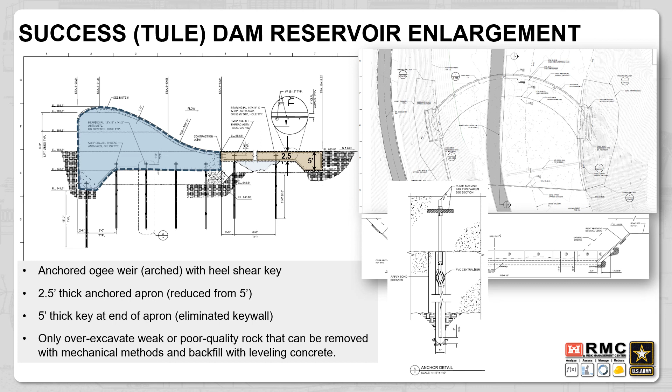We would only over excavate weak or poor quality rock that can be observed, mapped, and identified, and can be removed with mechanical methods. Those zones would then be backfilled with leveling concrete.

The last part of this is the design adjustment for PFM 13, the left abutment stability. We were going to flatten and reconfigure the left abutment slope in the vicinity of the ogee abutment and the rock wedge and the training wall to provide adequate wedge stability, in critical areas.

This is going to come down to field observations, field mappings, and field documentation. This would also include improving stability using drainage. We're going to put some post-tension anchors through the wedge and into the training wall, so it'll be an anchored block with more robust resistance, and additional excavation on the slope to unload the wedge in the upper area.

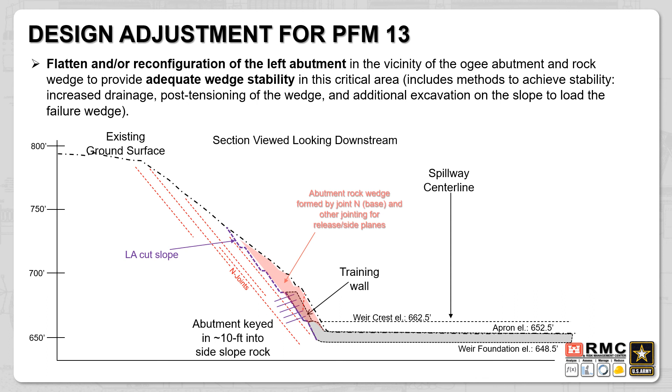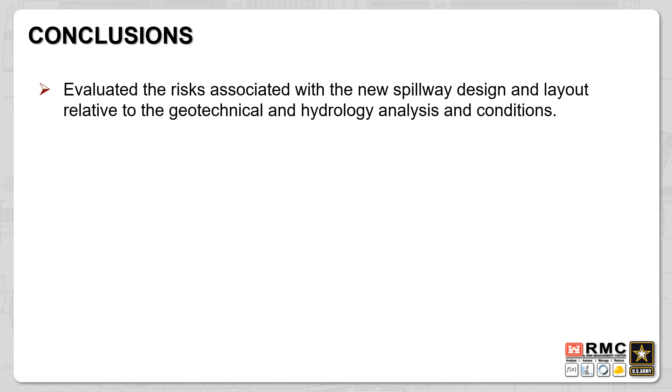So the conclusions from this presentation: the risk evaluation team looked at the risks specifically associated with design of the new spillway and layout features, relative to the site-specific geologic, geotechnical, and hydrologic analysis and conditions. We looked at that in a lot of detail.

We were able to identify costly design features that did not improve the reliability of the structure or reduce the risks of the project. For example, the erosion key walls, the head cut key walls at the end of the apron and at the heel of the weir structure.

We were also able to identify features that might require more robust design for the conditions and the risk driving failure modes. For example, the left cut stabilization and the out of slope dipping potential wedge failures, and bringing some structural elements into the design to help reduce the potential for wall damage during flow events.

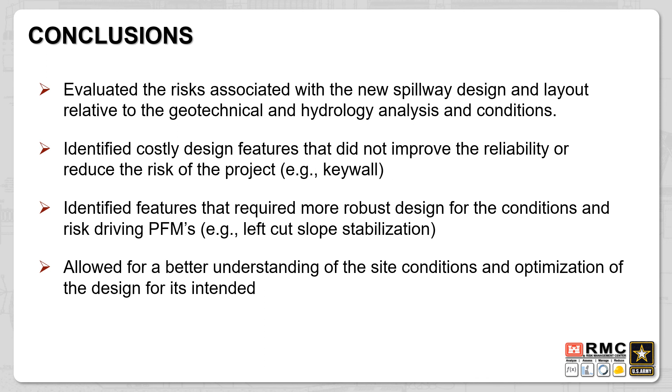The process allowed for better understanding of the site conditions and also for optimization of the design for its intended purpose.

We were also able to improve communication between the project team, the district, the division, and the designers, and the risk management center and headquarters, able to communicate our justifications and basis for design in an efficient and effective way.